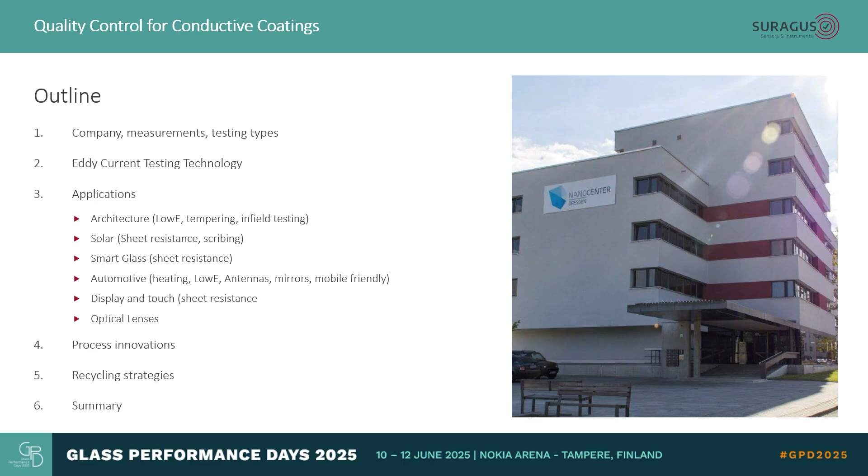Today I'm going to present inline metrology for coating, for glass coating processes, and at the end I will also talk a little bit about recycling strategies and applications of eddy current systems in this niche. The outline is pretty long, so I will go a little bit through technology, then applications, and process innovations and recycling strategies.

Not every one of you knows SURAGUS yet, but I see many familiar faces that know us. I'm very happy about it. I'm also here to catch up with those folks.

For those who don't know us yet, we were founded in 2010, with about 50 people, a multi-diverse workforce focusing on one technology, which is eddy current testing technology, and we just celebrated 2 weeks ago our anniversary, 15 years, going from 1 to now close to 50 people. It was a tremendous journey, and we met a lot of people and learned a lot of insights about different technologies and applications, and glass is one of our key topics.

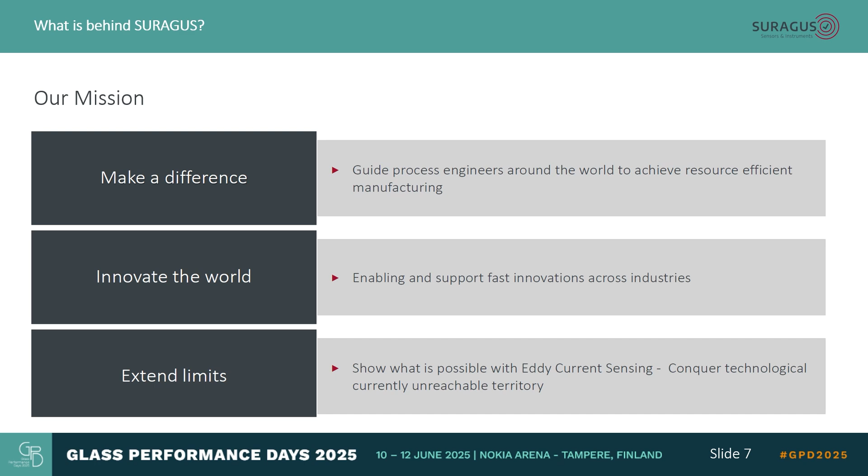Our mission is to support process engineers around the world to achieve resource-efficient manufacturing, and we also want to enable and support fast innovations across industries. This is what we do with our sensors and instruments, and we also want to push the limits in eddy current sensing. What we do with eddy current sensing is emissivity testing, sheet resistance testing, metal layer thickness testing, glass thickness testing, checking scribing integrity, and also line resistance for printed electronics.

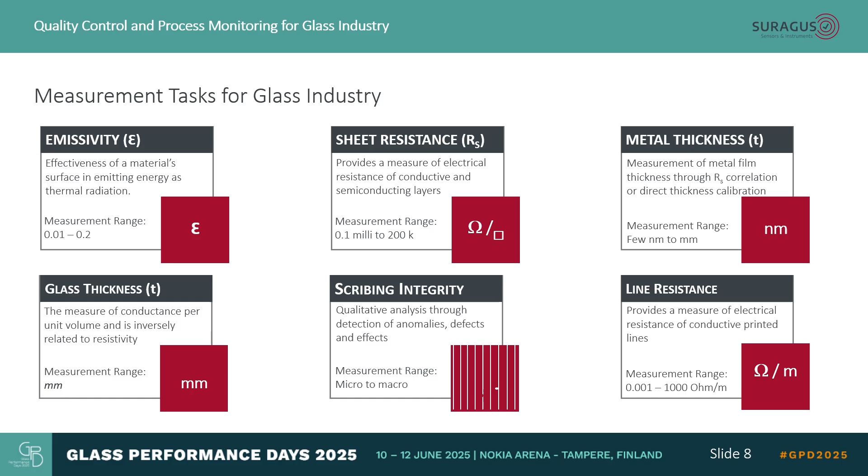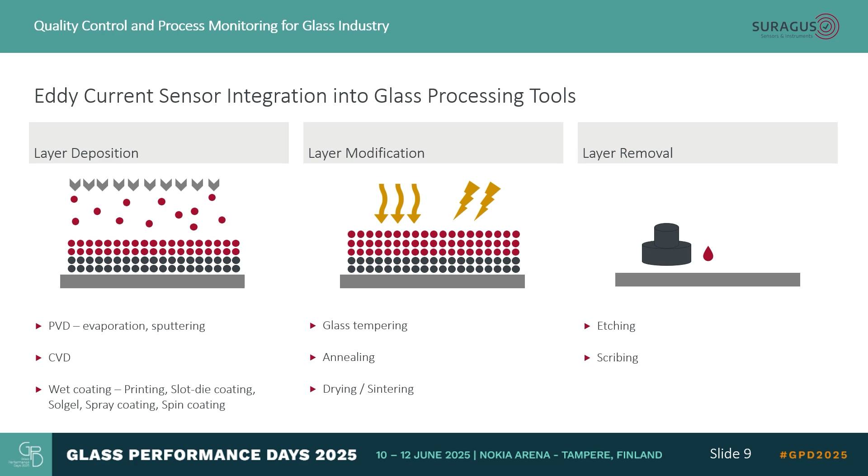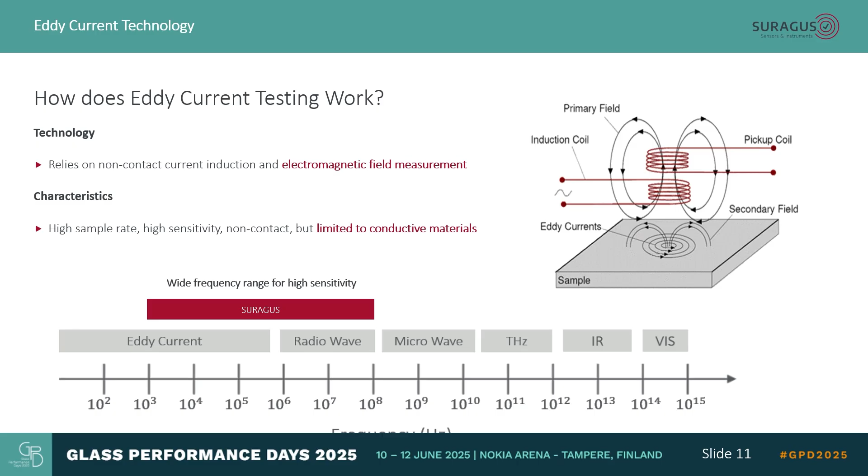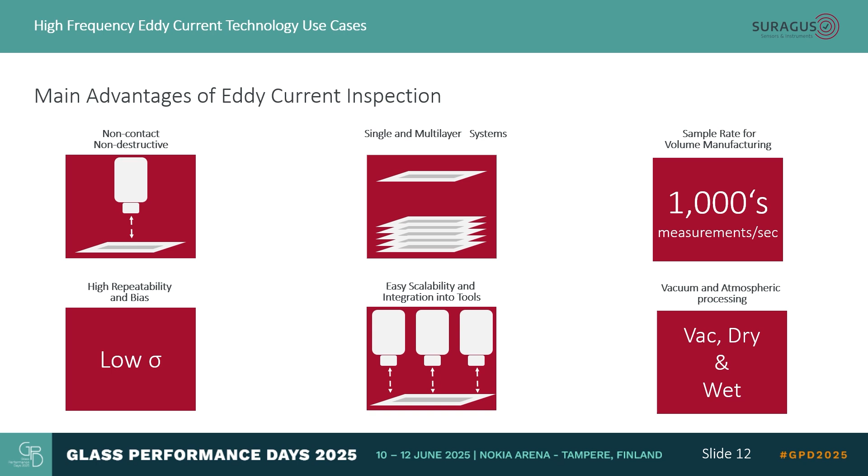It's applied in layer deposition, layer modification, but also layer removal processes. So everywhere where you add, change, or remove conductive materials. The technology itself has been in industrial application since the 1960s for crack testing. It's basically relying on creating electromagnetic fields which interact with conductive materials. It's a very fast technology. It's non-contact. It can penetrate through oxide layers. It can be applied in vacuum or in wet or dry environments, and it has a very high repeatability.

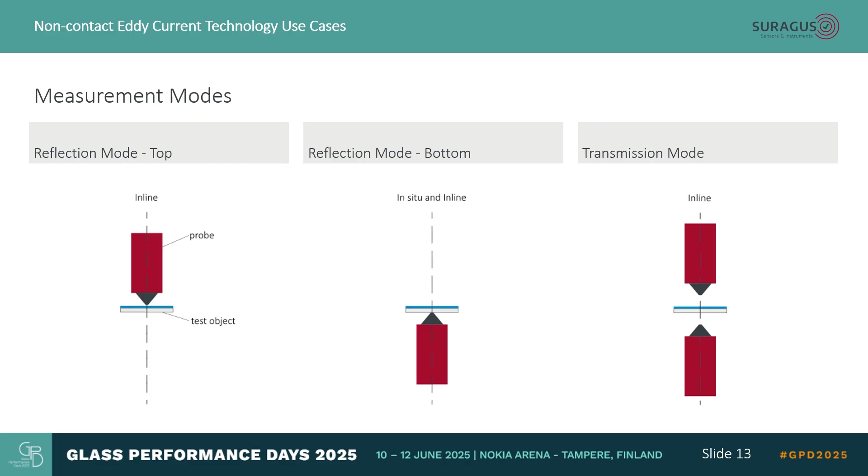There are different concepts, measuring from the top, measuring from the bottom, measuring in transmission mode. They all have different pros and cons. And the key for the architecture glass industry is that the sheet resistance correlates with the silver thickness. So that is basically one aspect. And the other aspect is that the sheet resistance correlates with the emissivity. So emissivity is also one core aspect that we take care of.

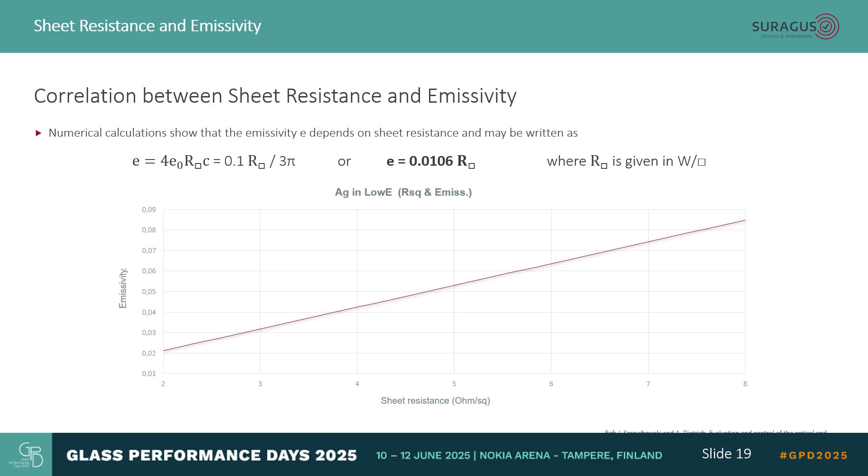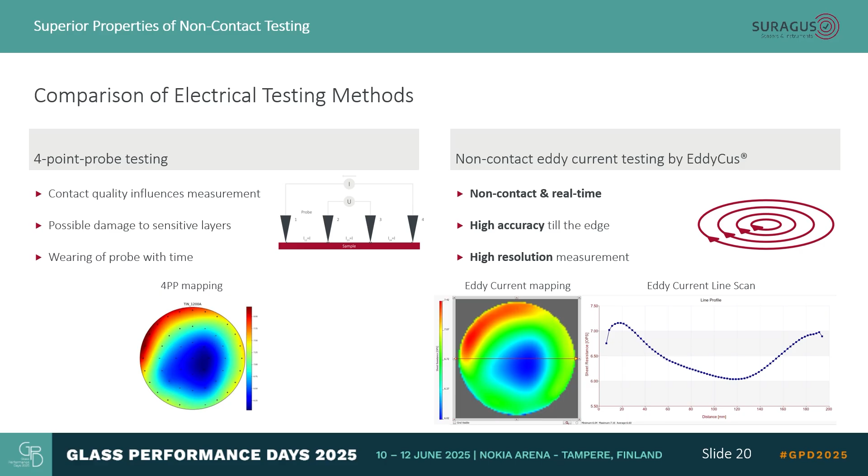Another testing method for sheet resistance is the 4-point probe method, which is a contact method, and which gives the same results but has a lot of disadvantages. With the eddy current testing approach, we can do portable testing, single point testing for the labs. These kind of tools are used in quality assurance labs for glass around the world. We have customers that have close to 20 of those devices that do this manual testing.

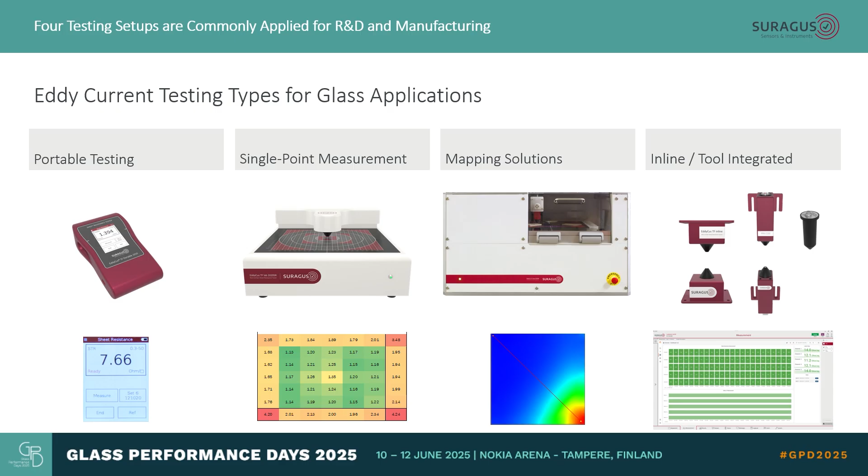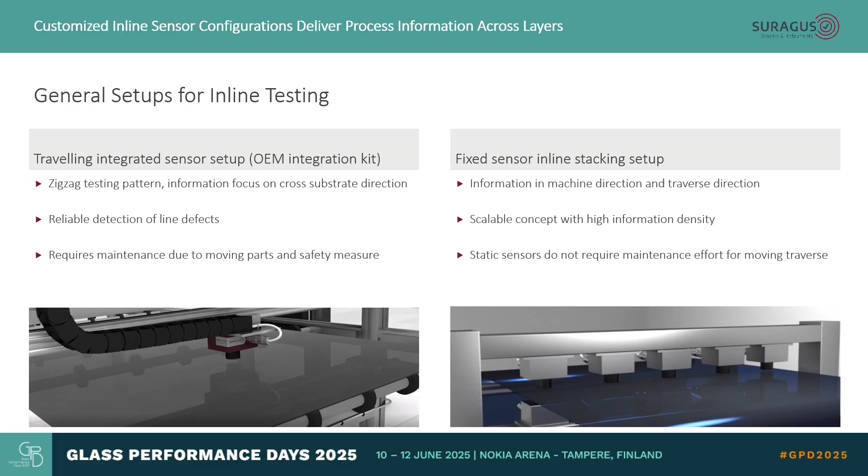We have mapping solutions, but the core is inline solutions. And in these inline solutions, there's basically two versions. One is to measure on a moving stage, on the left, or having many sensors installed across a web. The applications around the industry are very wide. We have automotive glass testing, mirror coatings testing, smart glass as an application, solar glass as an application.

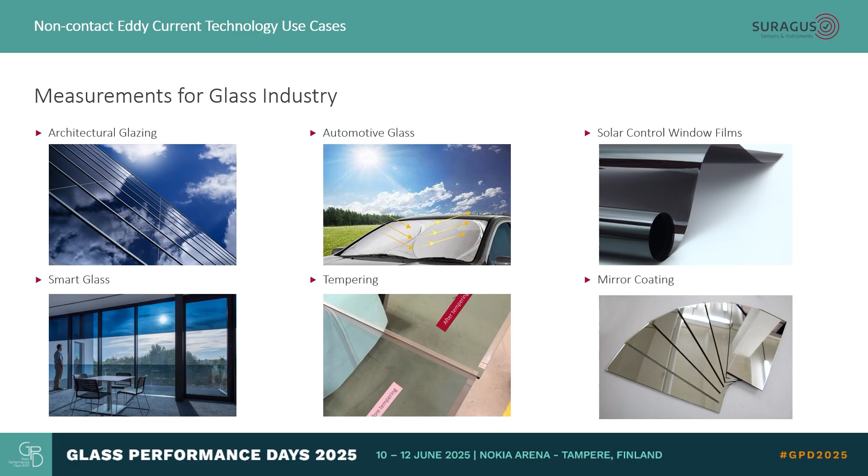And now I would like to carry you through these different fields where I would like to show you what we do. In architectural glass coating, it's basically characterizing the silver deposition. Tempering is another topic in the value chain, and then the final inspection in the building.

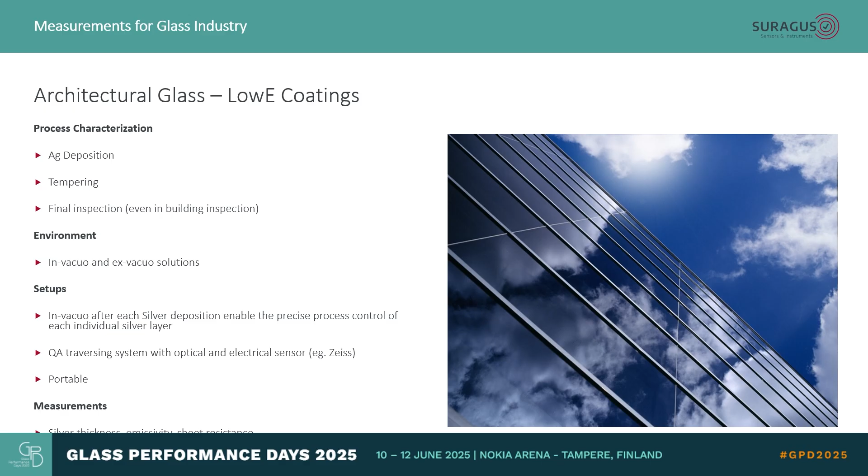This can be applied in vacuum or non-vacuum, but let's go to the silver sputtering as a process itself. Here the strategies are measuring directly after the deposition. There are different sputtering technologies where you can modify the sputtering homogeneity across the glass. Then it also makes sense to measure on different positions across the glass and to directly control the deposition process

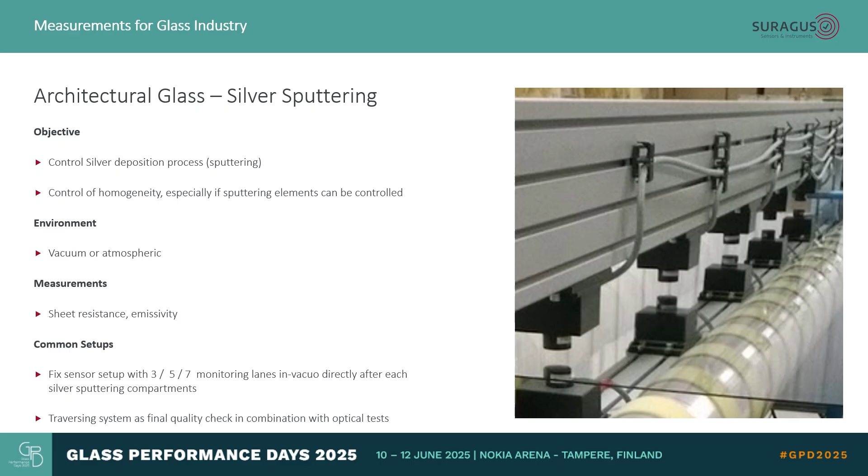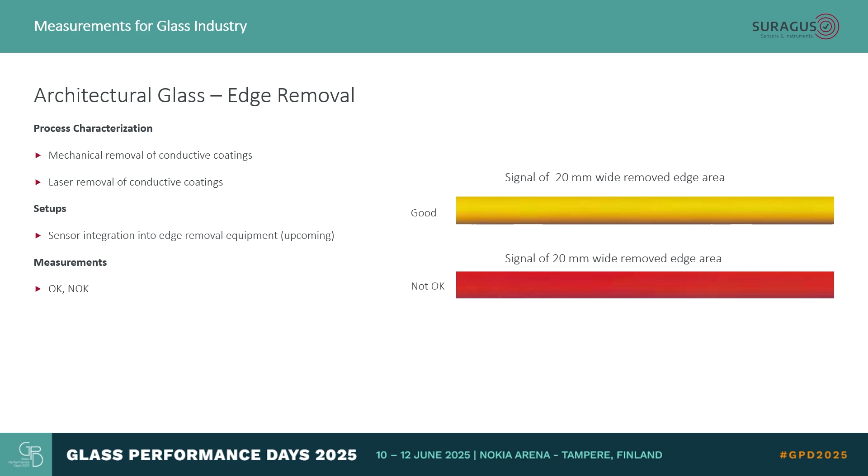in the vacuum. But very often there's also a final inspection, mostly together with an optical system, to scan the final inspection of the total glass of the coating stack. Another application is edge removal or glass inspection to make sure that all the conductive layers have been removed. That's one application. Another application is to measure before and after the tempering process.

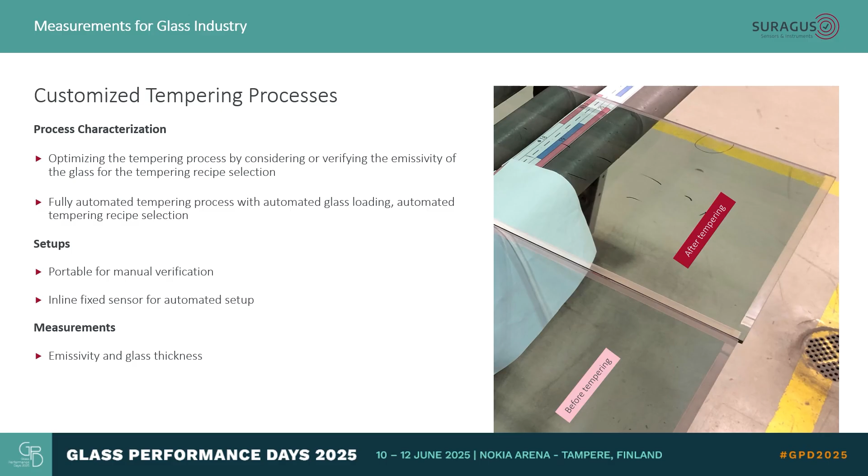In the tempering, it's important what kind of glass you temper. Do you have a single low E? Do you have double low E? Do you have triple low E? And typically, the people running the tempering furnace need to select the right recipe. And in a night shift, there can be mistakes.

So one approach is to measure what type of emissivity do I have, what is the glass thickness, what is the emissivity, and also we can check whether the coating is on the right side. Tempering the coating on the wrong side is also an issue. So this can be inspected.

And we did some study, I think 2 or 4 years ago, I gave a talk about it here at GPD, to test across Finland. We've been to different tempering sites and we presented a lot of data. And we can determine what kind of glass this is. Is this from Saint-Gobain or is this from AGC? So we can detect what kind of glass is coming and automatically feed this through to the tempering furnace, and then allow automated recipe selection, for instance.

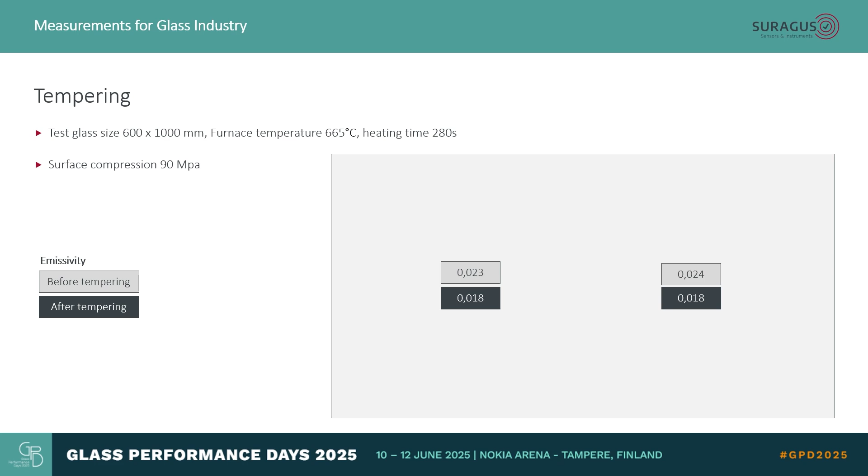The emissivity changes quite a bit, sometimes 30%. Here are some examples from one glass before tempering and after tempering. There's more data. It's a special topic, so I will not go into this too deep, but it's a good application to know the emissivity before the tempering and feed it directly to the furnace.

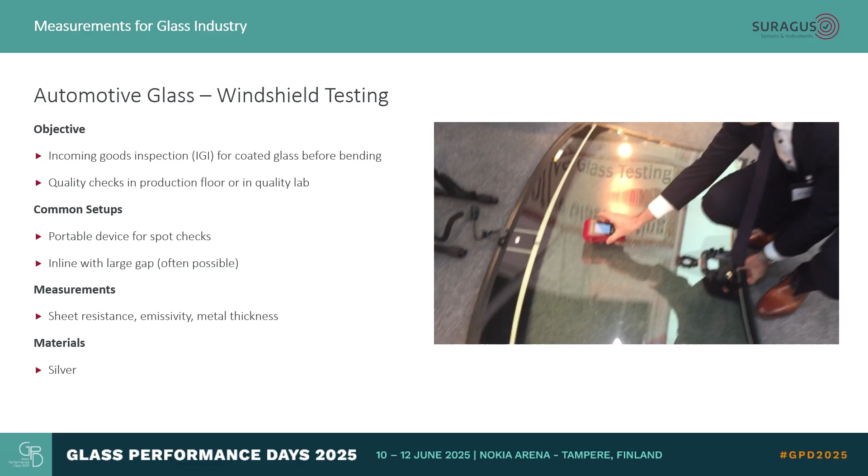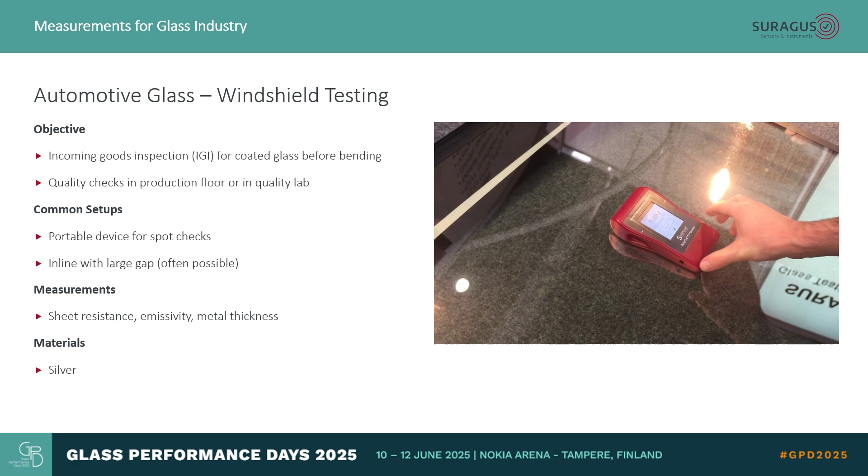Another part is windshield testing. A lot of windshields are produced each year, and doing quality assurance there is quite tricky. There's a lot of work done in the lab with manual devices, but there are also inspection strategies to put sensors in line.

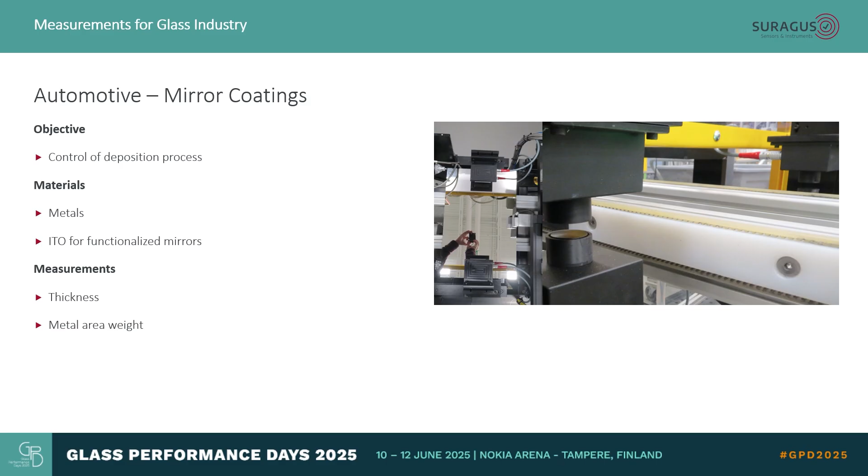There's mirror coatings, there's thickness and metal area weight, there are different units, and there's also more functionalization of mirrors. Sometimes we have displays inside, so we not only have metals, but we also have ITO inside, and there is a variation of topics that are also tested with eddy current inspection. Another topic is antennas in windshields. There's a lot of antennas these days.

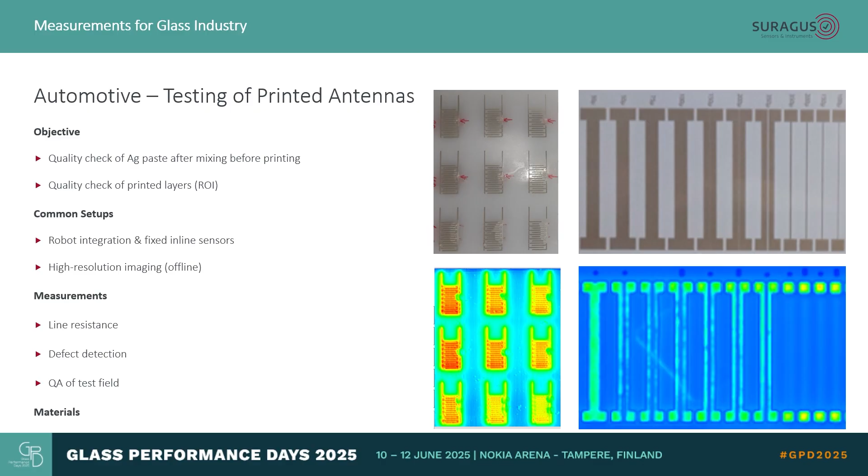And of course, there needs to be the formulation of the paste. So we have a sensor which is analyzing the paste when it goes through a pipe and it interacts with electromagnetic fields. So we can see the paste composition, the dielectric and electric properties of this paste, and we can predict processability downstream. Later we can also test the printed antennas and see whether the line resistance is correct or whether there are defects. Very often the optical image does not tell the truth about the electrical performance.

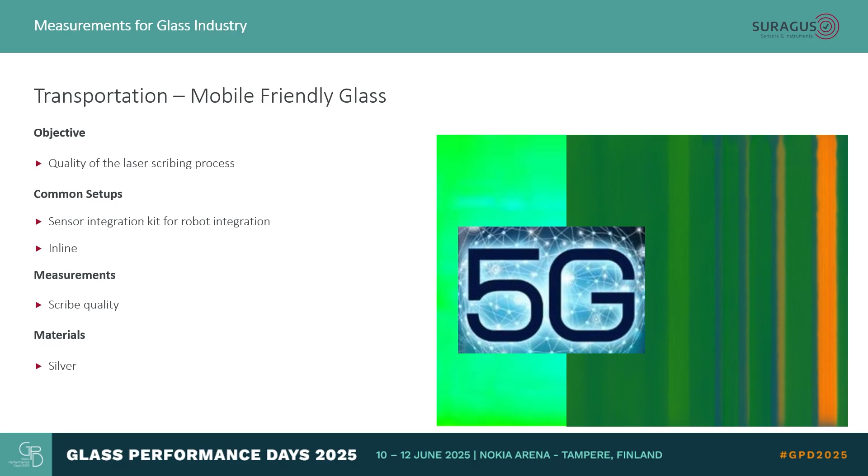Another application is mobile-friendly glass. There is a functionalization possible by a company which is also here. They are able to make glass which is running in trains, for instance, mobile friendly, so that you sit in it and you can have a good mobile network connection. This is done by scribing, and we can test the scribing integrity, whether this really works. There are some other aspects that this can be used for.

Another application is solar control films as a kind of retrofit strategy. And finally, a big application is solar glass. Solar glass needs to transport the current. So you have a front electrode and backside electrode. There are lots of different materials, but it's a nice application. Also important for recycling.

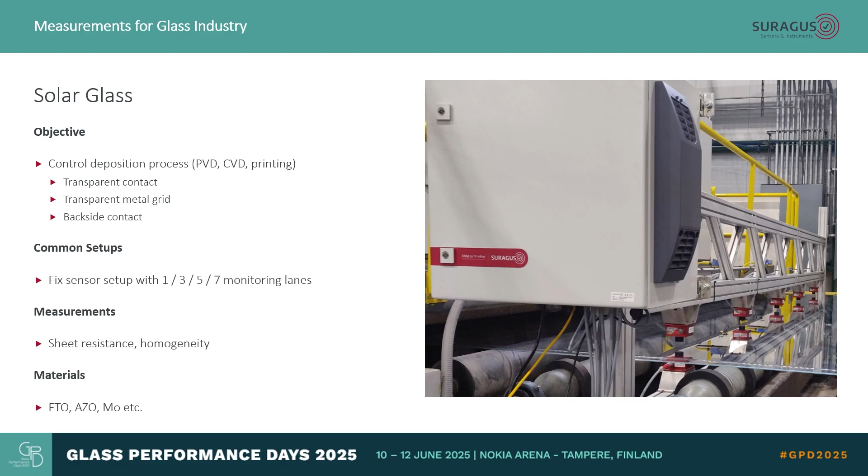Maybe we can come later to that. Eddy current is also able to image electrical performance. So this is kind of not a photo, it's basically a measurement. Each pixel is a measurement, and after a certain time, roughly 1 minute, 2 minutes, you get such an image depending on the size.

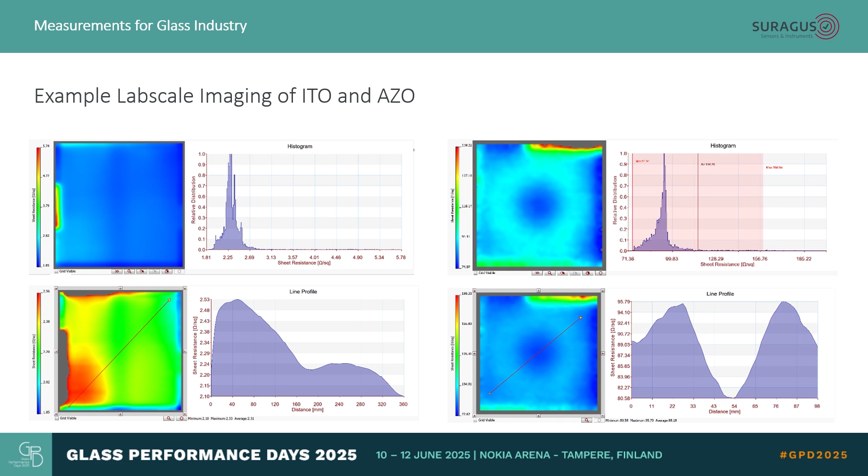And you can see process artifacts or process characteristics and improve homogeneity. Often it's about homogeneity and about finding the right level of sheet resistance. Not too much material, not too few, and having the right electrical performance.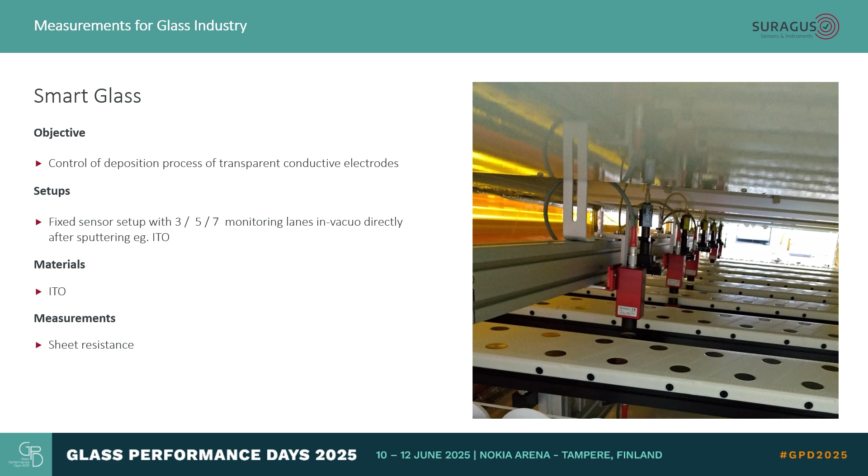One more application is smart glass. Smart glass, I think 5 years back we had a lot of applications there. Now it's a little bit less. Smart glass also needs to be conductive. So you have a transparent electrode which needs to fulfill optical and also electrical parameters. And there are very many interesting aspects to smart glass deposition.

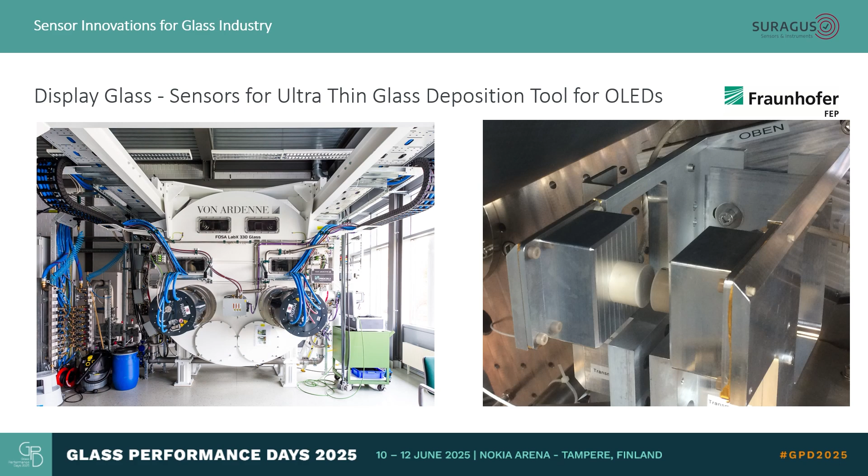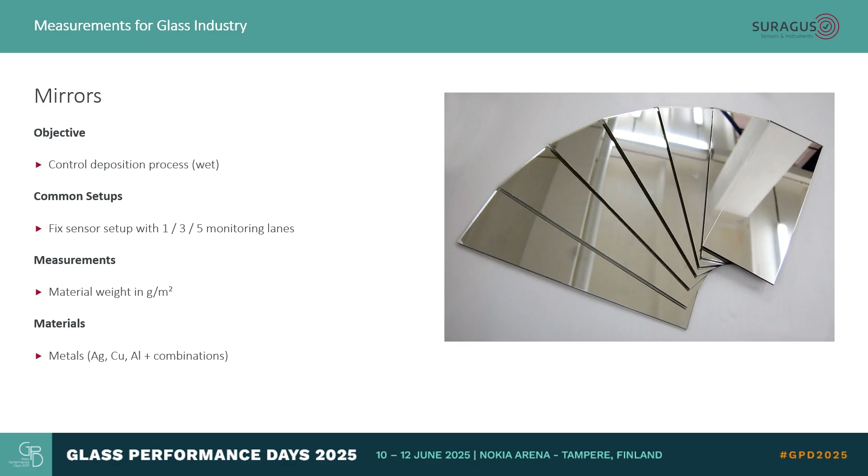Another application is for display glass. There's a machine in Dresden standing at the FEP, which is an ultra thin glass deposition machine, which is good for OLEDs, for instance, because glass has a very good barrier property. We talked already about automotive mirrors, but there are also other mirrors, and there are also touch panel sensors, which are used to functionalize glass.

This is a big trend. Glass is a lot of area. You can do solar, you can do display, you can do touch, you can do all sorts of things, emissivity, and that's so interesting because now things become more and more integrated over time, and of course conductive layers play a big role in activating some of those functions.

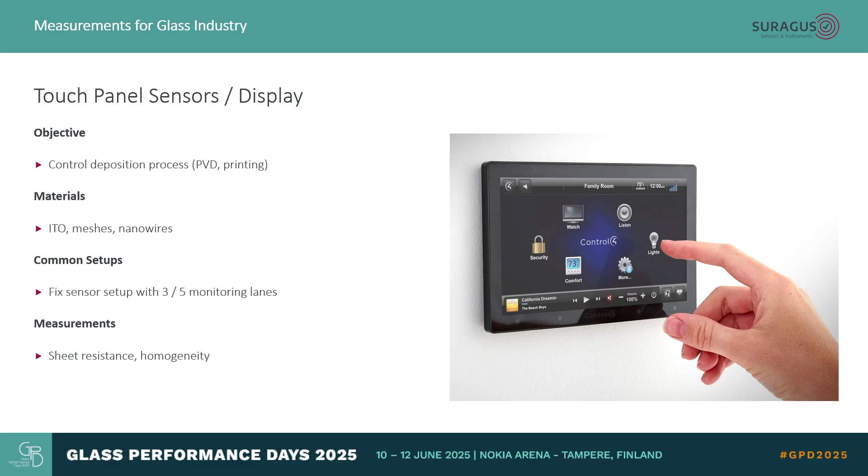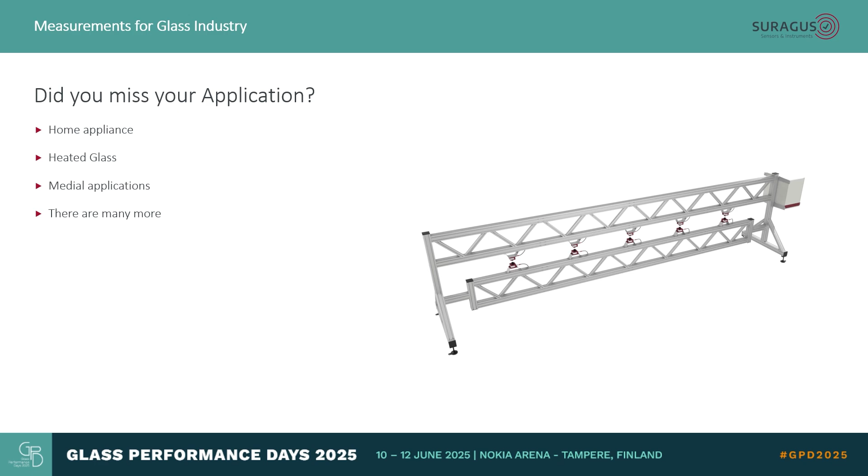Of course, I did not touch all the applications. There is heated glass, for instance. We have customers that do sensors for like a carpet to see where people walk. There are medical applications, home appliances, and many more. And I hope to learn about new applications together with you at this event later today.

Now let's talk about sensor innovations. The key for a good sensor is to be able to provide a lot of value. A good value for a sensor is when it's applied very early in the process. So we try to get as close to the deposition as possible. In an optimum world, we would measure during the deposition, but our sensor would block that in some cases, so we go as close as possible.

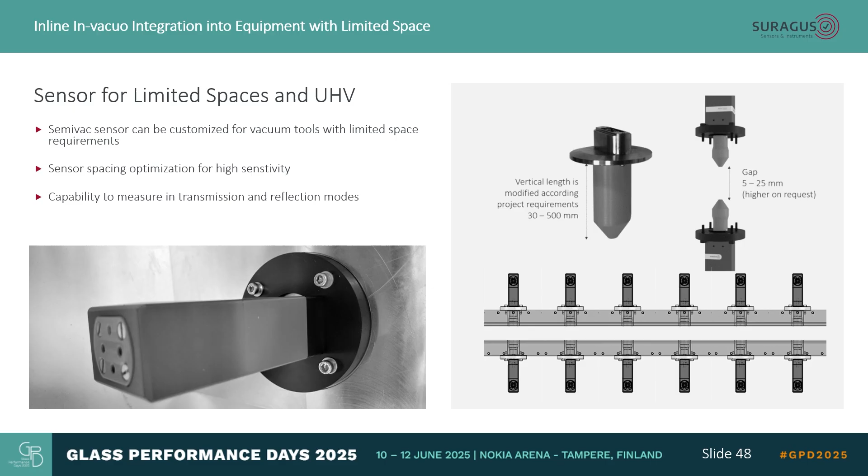But sometimes it's tricky for different reasons. Sometimes there's not much space. So we think about how we can have very small sensors or bring the sensors into the machine in a way that they stay mostly outside and don't take much space. Another way is to have very small sensors that can be fitted in really tight areas, but at the same time are able to withstand heat.

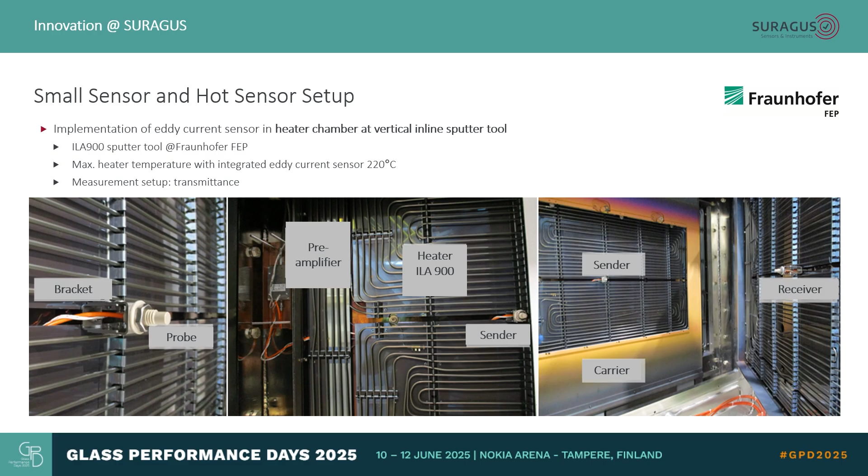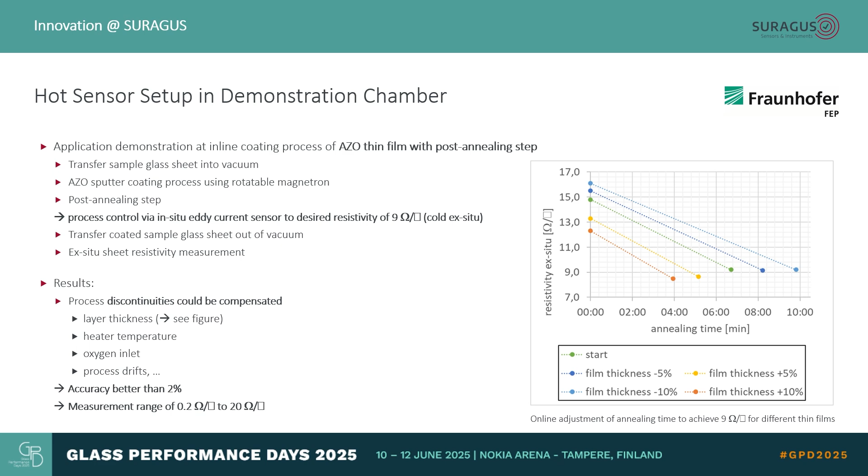So we have sensors that can withstand quite some heat, and now we are trying to push the limits up to 500 degrees. At the moment, we are able to do it up to 220 degrees. In this application, these measurements were used to control the tempering. There was some AZO which was tempered for a certain time. The idea was to get it to 9 ohm per square, and we changed the tempering time and used it for quality control.

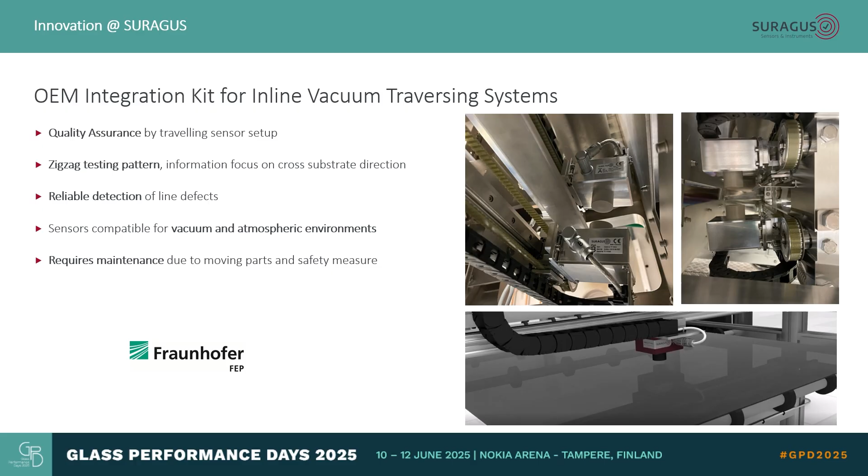Another way is of course to measure in the vacuum. Let's go to this slide, which is kind of a standard application, so you have many sensors in the vacuum. But in some applications, you want to have a traveling sensor, and this is a traveling sensor, so it can go back and forth, and you can have really high resolution across the web or across the glass within the machine.

So this is also bringing new capability into the deposition world. These arrays are also interesting. Technically, we can build arrays with 128 sensors, so you have a lot of information.

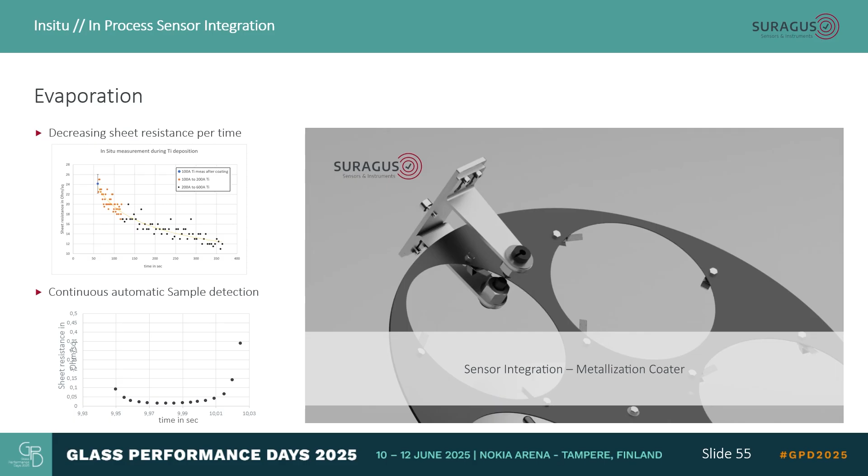That is also possible in vacuum. And another way is to have sensors. Sometimes we have rotating material like optical lenses and so on. And in this case, it's really nice because it's possible to measure during the deposition. So we can see round by round how the new atoms are added to the layer. And then basically you can deposit until you have exactly the number of layers or number of monolayers or the right sheet resistance that you need.

The time stopped on my display, so that is kind of risky for me because I tend to talk too long. We have 5 more minutes, but including the question and answer session. Okay.

So why is this so important? Let's stress the benefits of near process monitoring. Sometimes there are test samples just to make destructive tests later, so you can avoid that. You can get the feedback within the chamber, do fine-tuning right away, run-to-run control, improve the deposition, and optimize the deposition rate right away. Sometimes you can increase the throughput, but one part is also confidence.

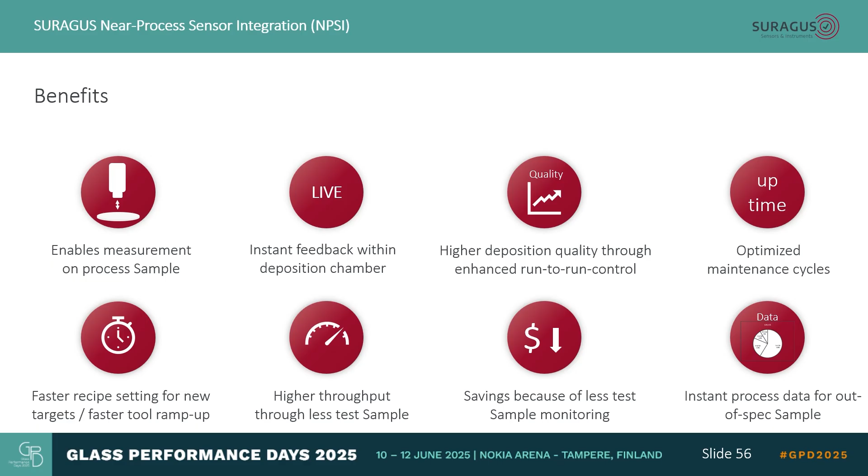Yeah, confidence in what you do, and after you change the target, to get back to the level where you want to be. So that was some insights about near process monitoring. Now I would like to bring a new topic to the table, which is basically concepts for recycling.

Recycling is something that many people talk about, but in many industries it's not thought through fully. I was just at a battery conference. Battery recycling is also a topic where it's more expensive to create a battery that can be dismantled and separated than just plugging it together and shredding it. And similar aspects we have here.

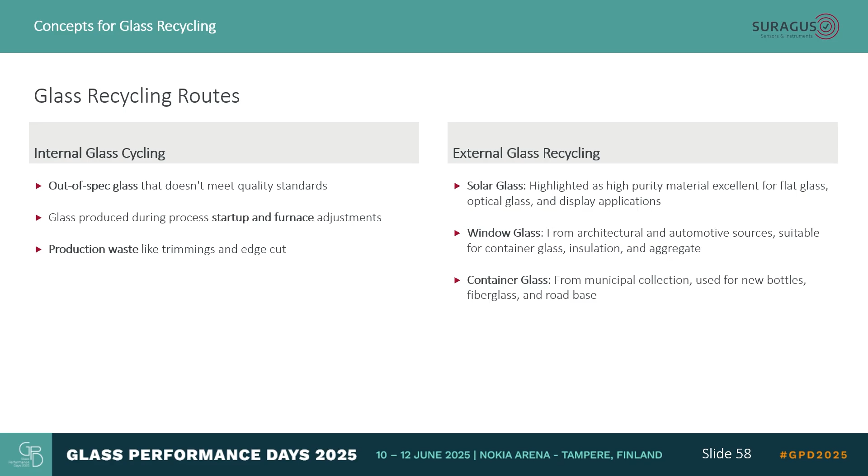So in recycling, there are two routes, in my understanding. One is to do the recycling during the process. When you deposit on glass and you know this glass is not good yet, or you collect the trimmings and the edge cuts, this goes back in the loop, and that works pretty well. For external recycling, I think more can be done. There's a lot of solar glass upcoming which can be recycled. There's window glass which can be recycled more, and also container glass. There is already quite a good loop.

I tried to collect some numbers. So 1.5 million tons generated in the EU alone in construction and demolition, but just a few % of that is getting recycled at the moment, and there's a huge potential. Most of the glass ends up in the landfill, and that's it.

If you look at the solar glass, we see that there is expected 80 million tons by 2050 globally. And solar glass can be quite good glass, so there's a big potential to recycle that. Of course, there are different types of solar, coated and uncoated glass, but I don't go into this here. And the last part is automotive glass. 27 million vehicles are recycled globally per year. That's a lot of vehicles.

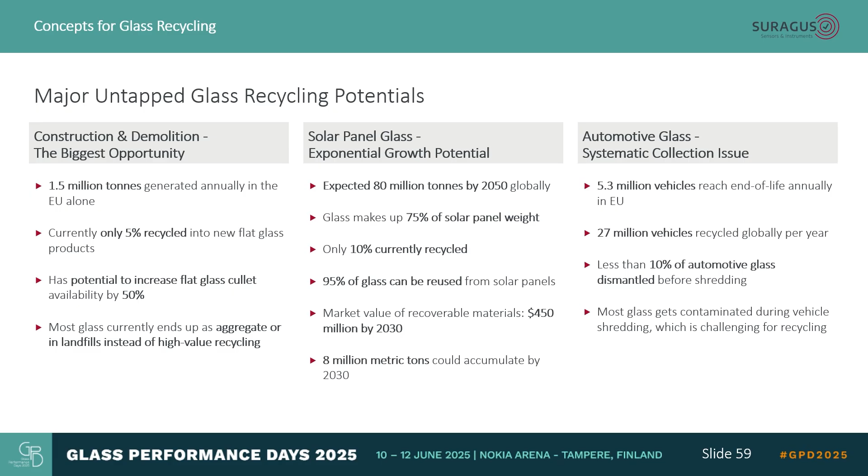And the problem is most of this stuff is somehow shredded, and then it's broken, and it's hard to sort it. Yeah, and that's kind of a challenge. Also, when we look at the windows themselves, we have different types of glasses, and if we look at a building which is 50 years old or 40 years old or 20 years old, we don't know exactly what kind of coatings we have.

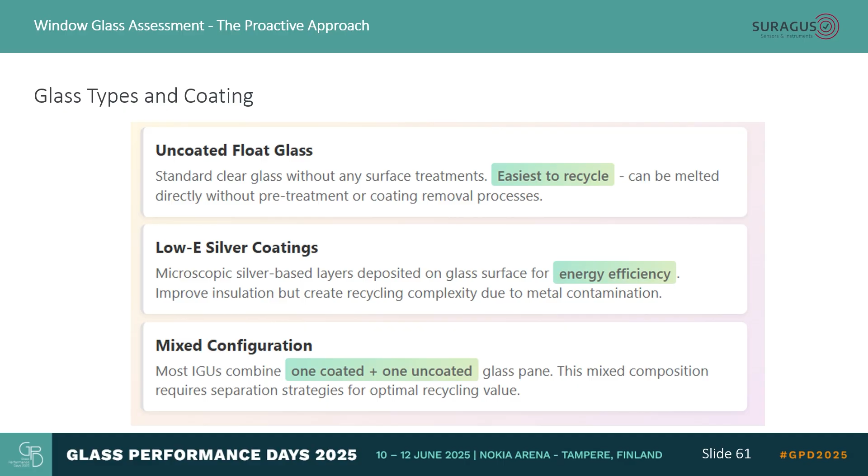We have 30 more seconds. And thank you very much. I work best under pressure.

So there are different glasses and there are different potentials. So the idea is that the glass is tested, and there are people here who do it. There's another talk at 4 p.m. about that, I think. To measure, go inside the buildings, test the glass. What type of coating do I have? Is this still a good emissivity, or has it gone bad?

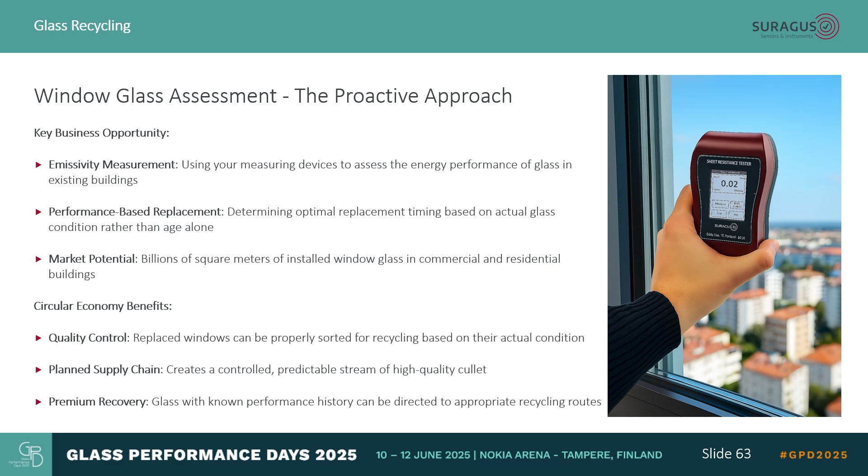I can plan recycling strategies or refurbishing strategies, and I can also select routes for recycling out of that. So that is quite some potential, and I think we will hear more about it in some other GPD.